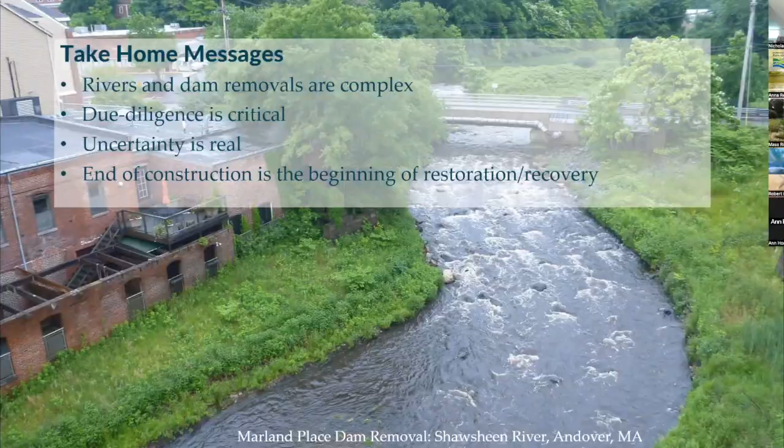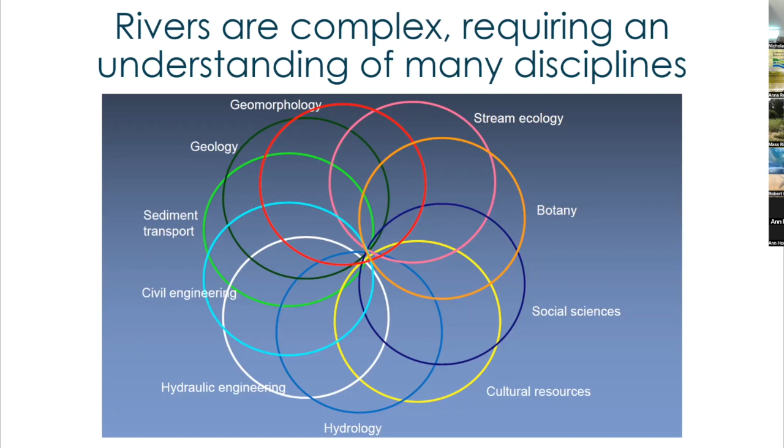And so having a team together that understands the different elements of what's required for your particular dam removal is really important. If one person is coming to you and saying that they know everything there is to know to take out your dam, I'd be pretty skeptical of that. I have not found a person that has all of that information in their head.

And there's a lot that goes into the initial data analysis and data collection. So I'll start with this idea of forensic geomorphology. As a geomorphologist, I might be biased, but I think that geomorphology is the framework in which everything else comes. But I know ecologists think otherwise and engineers think otherwise, and I respect that as well. But forensic geomorphology we find to be really important to understand where the river has been in the past, what the history of that river is, and what the human history and impacts have been, and what the trajectory is going to be.

That requires a lot of investigations, field investigations, office investigations, study of historical maps, historical air photos, historical documents that might have text that talks about these rivers and dams back in the 1600s. There is some great documentation in the 1600s of conversations that were happening in Taunton about whether or not to build dams on the Mill River. They'd seen dams go up elsewhere and seen the catastrophic impact to the herring. And so that conversation is documented in the 1600s there, which is pretty neat to see.

But those maps can be really helpful in understanding what these rivers used to look like. But it's critical also to remember that that's not necessarily what this river is going to be in the future. But it's still really helpful to understand what it was and what the trajectory is.

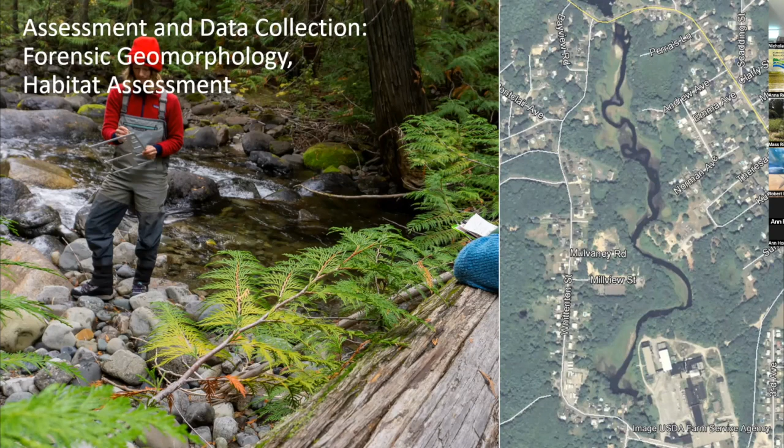Maybe there's a wetland delineation that needs to happen. That's part of this. Maybe there's a botanical survey or a rare species survey or general floodplain habitat assessment as well. Those two assessments typically go pretty well together, the geomorphology and habitat assessment.

We can survey the vegetation, changes in vegetation, the ordinary high water marks, different types of features that are critical for the regulatory entities and regulated resource areas. If there's a wetland delineation, that can be surveyed in at the same time. You might survey in different features that you see, like the stumps or boulders or riffles that you might see within the stream system. And you need to think about the extent of your survey.

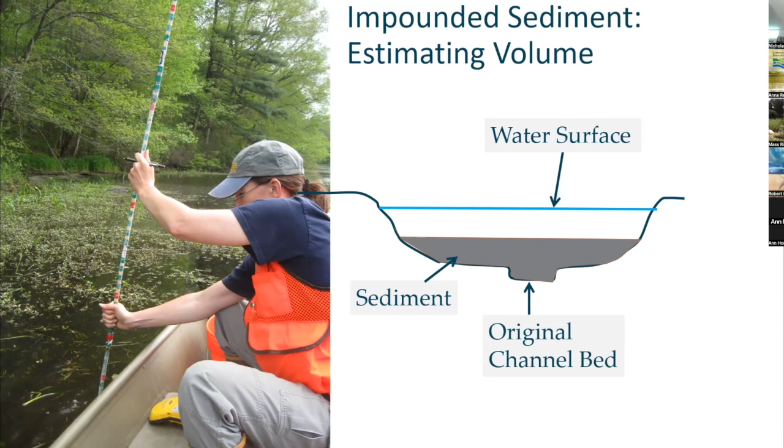But if you have impounded sediment that might be coarser sand and gravel, you can't do this. But you still might want to understand what that volume is. So there might be other tools, or they might have a bigger, deeper impoundment. So there's boat and barge-based vibrocores. There's GPR, ground penetrating radar, that can have some functionality, and other boat-based remote sensing that can get some of this information as well.

Coring helps us to collect some samples to then send to a lab and understand the contamination that might be in there. There are many state licensed labs around that do these types of testing and analyzing, and they send you the bottles, and you put the sediment in the bottles and follow their directions, and then they run the test back at the lab.

So a couple of things that we like to make sure of for the sediment sampling is getting a full composite sample from the top of the sediment down to the refusal layer. So you're capturing that whole layer of sediment, the full thickness, and making sure we are working with the state agencies, the Department of Environmental Protection, sending them a sampling plan, getting some feedback, hopefully, to help guide that sampling plan and moving forwards. Typically, there are multiple rounds of sediment sampling required.

This initial phase kind of gets you an idea of what contaminants might be there. And then if there are higher concentrations of some contaminants, you can zero in on those areas and get more detailed sampling, or depending on the designs, shift the next round of sampling as well to make sure you're understanding the quality of the material that either may be released downstream or might be removed for reuse somewhere else or disposed of in a landfill.

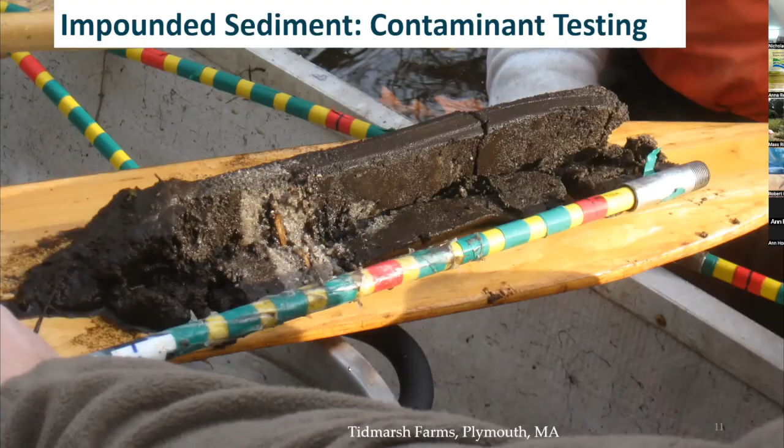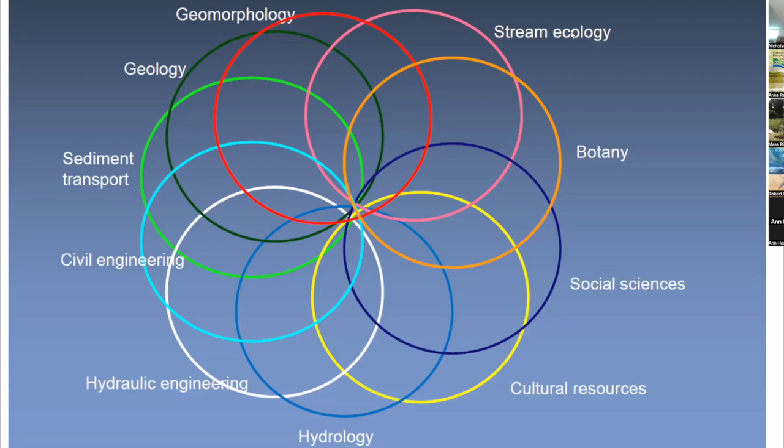So we come back to this in terms of thinking about the complexities of the field-based work and data collection, and in a similar way, we need all of these tools for the analyses as well. So that's what we're going to get into now.

There are so many different types of analyses, engineering analyses, ecological analyses, geomorphic analyses to think about with dam removal and river restoration projects. Some of the big ones that we often think about right off the bat are understanding the hydrology. How much water is in the system? When does it flood? How often does it flood? What are the magnitudes of those floods?

And then the hydraulic modeling. Typically in the past, HEC-RAS one-dimensional models were sort of the standard, and they still are the standard, but there's a lot more 2D and 3D modeling happening on rivers nowadays. It's become a lot more user-friendly and interesting to do and easier to do. But the basic gist of it is that through the hydraulic modeling, we can understand where the water goes at various flow levels under existing conditions and under proposed conditions. So those are really critical analyses to be run right off the bat.

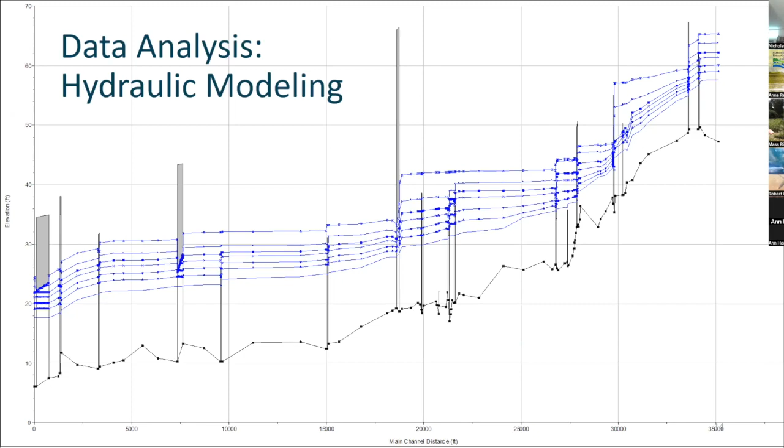But there are so many other design studies and calculations. You need to figure out what size channel you're going to build. If you can't just take out the dam and let the river go, you need to design the river channel. What's the size? What's the width? What's the depth? What are your bank slopes? What's the bed structure? Do you have a riffle pool system, or do you have a riffle run, or do you have more of a low gradient wetland stream system? What's the bed substrate like?

Do you need to import some rounded stone to create riffles so that you don't create a head cut and migrate some erosion upstream? Do you need substrate that is sized appropriately to limit bank erosion and to limit bluff erosion? What's the bank design? Can you use large wood? And with that, how do you size that large wood? How big is it supposed to be? How do you prevent it from floating away? Or do you want it to float away? Those are all decisions that you need to make.

Fabric encapsulated soil lifts, the biodegradable fabric with the soil in there and seed and plantings. When is that appropriate to use? When is it not appropriate? Maybe you need to use riprap or more angular stone. What is the appropriate bank design for this particular site? We don't need channel dimensions twice, I already mentioned that. Floodplain width. How big is your floodplain? That's a design consideration.

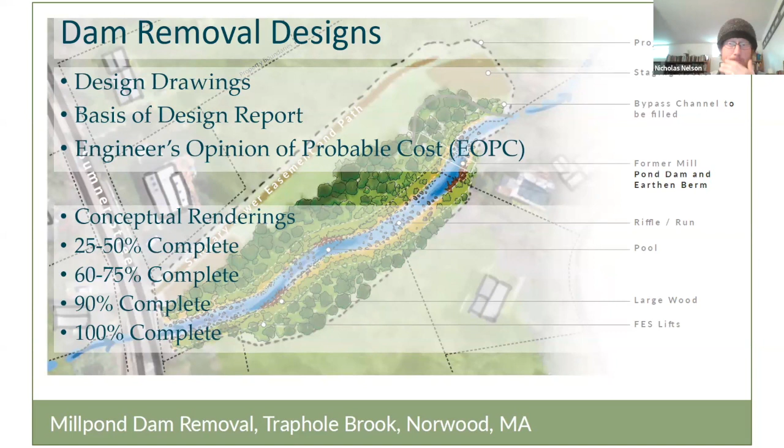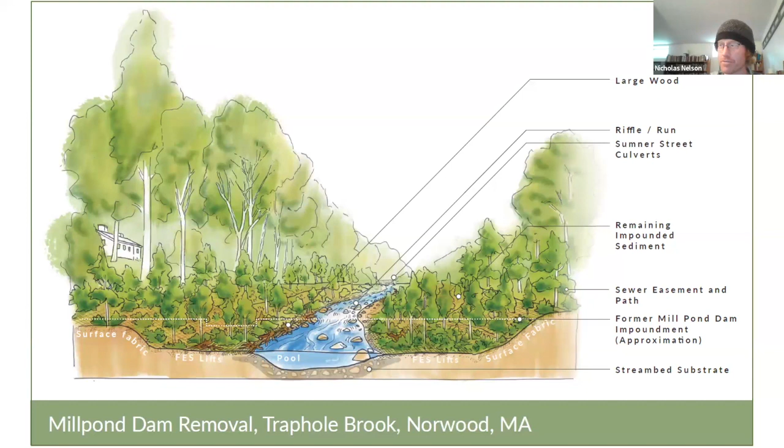So for this particular one in Norwood, this is on Traphole Brook, Mill Pond Dam Removal. Did some conceptual renderings and plan view. Gives you a broad brush idea of what it might look like. You could do these sidelong views, cross sections, or oblique views as well. Again, gives homeowners, gives the public a pretty good idea of what it might look like and kind of a visual of that. Also, examples of other projects really help for this also. If you can show examples of former projects that have already been completed, that's super helpful.

And then 40% design might have a plan sheet. You might have a number of design sheets that go together. I just pulled one out here to compare across a few different levels of design. So you can see there's some designing here, there's some engineering, there's some proposed contour lines, there's cross sections that are cut through here, there's a longitudinal profile on the bottom of the sheet. You can see some areas where we've suggested constructed pools in the blue, other areas of fabric and bank treatments in the green and the yellow.

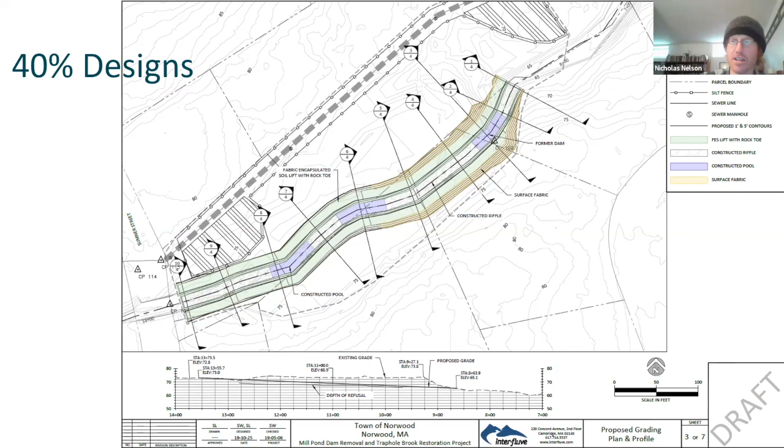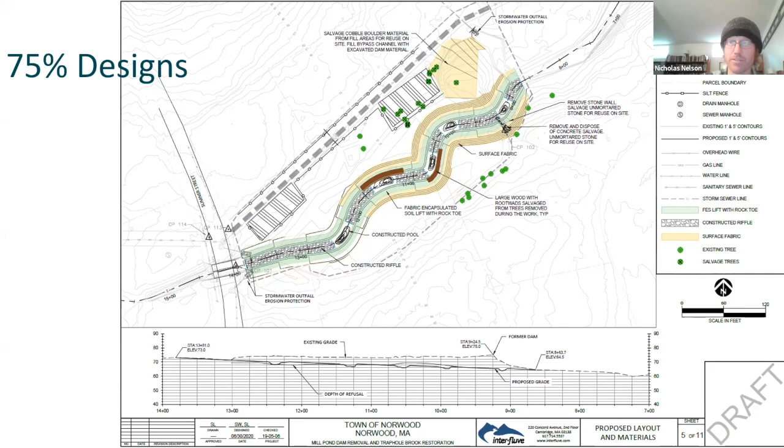And then when we get towards 75% designs, you can see there's a little bit more of a wiggle in the stream pattern, okay? We've refined that a little bit more. We can see the pools are a little bit more defined. We can see some stone in the riffles in between. We can see areas where there's some large wood proposed. We can see trees to be preserved and trees to be removed and salvaged.

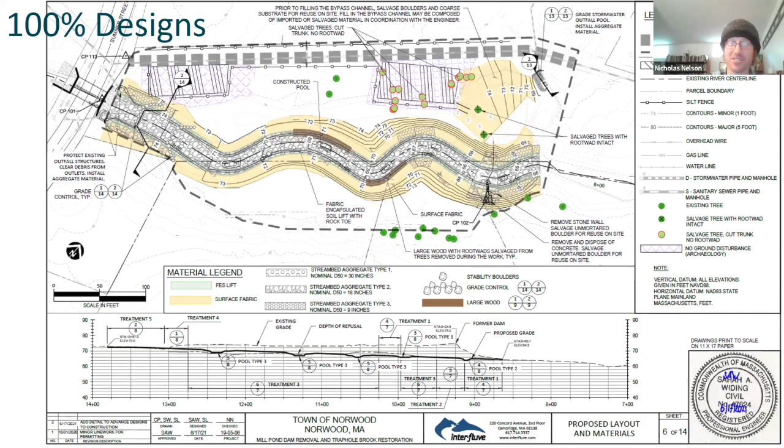And then in final designs, the alignment is pretty similar, but we see a little bit more detail in terms of the longitudinal profile and the materials that are in that material legend element right in the middle of your screen here. So a bit more detail there. So at each level of design, you add a bit more refining. What you're trying to do by the end here is get a plan set that the contractor can read and understand to implement that work. And so it has to be clear, has to be concise, has to be understandable and translatable by a contractor.

Construction cost estimate is a really critical piece as well through all of those different phases so that the project partners, you all can think about raising funds for the project. It's pretty rare for a project to have all the budget for construction right from the beginning. Typically, you are raising money throughout the process. And so I'll point out a couple of things here that I think are important when reviewing these.

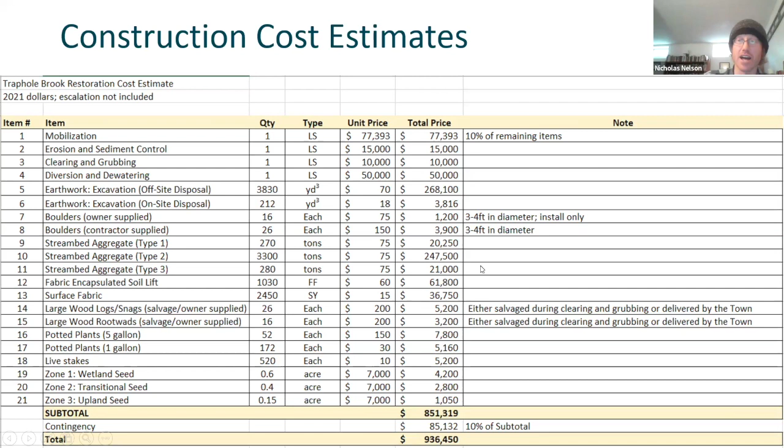At the concept level, that could be 50 to 100% contingency if you're at the concept level of design. If you're at that sort of 25%, it could be 30 to 50% contingency. So you really want to be careful to not attach a level of precision to this estimate that is not based on the level of design.

Okay, so moving through all the assessments, analyses, and designs and into construction. This is the fun part. You've got years of planning put together and designs, and you're finally into construction. How does this actually happen?

It seems exciting to use explosives to remove dams, and it has been done. You can see the Condit Dam removal in the White Salmon River in Washington. Watch this video, it's amazing. They used explosives to create a hole in the bottom of the dam, and it just released a torrent of water and sediment, and you can watch this time lapse, which is incredible.

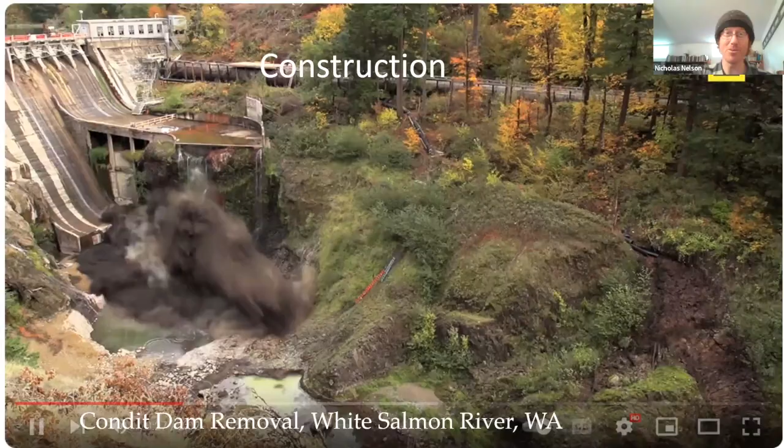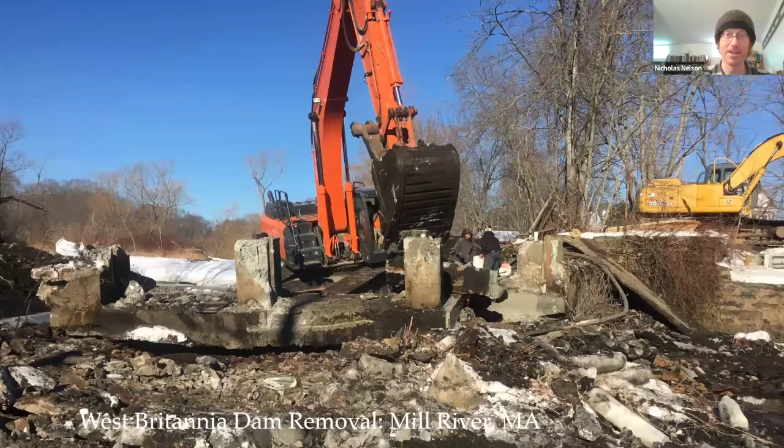This is typically what we see in Massachusetts, smaller dam removals where you have developed some water control to move the water around, and you're removing a small concrete structure. There's a lot that goes into figuring out how to actually do this. Some of that is engineering and the project partner team, but a lot of it's on the contractor to figure out the logistics. I'm going to go through a couple of slides here of common challenges.

One in particular is access, and I think I saw Kris Houle in the attendee list here. This was his picture for the Balmoral Dam on the Shawsheen River. This was a case where the walls on either side of the dam here in the river were considered historic and could not be touched. So we couldn't cut through those walls. And so the excavator had to be lifted into the river, into a place that was walled off by a porta dam. And they had to do all the work from inside the river.

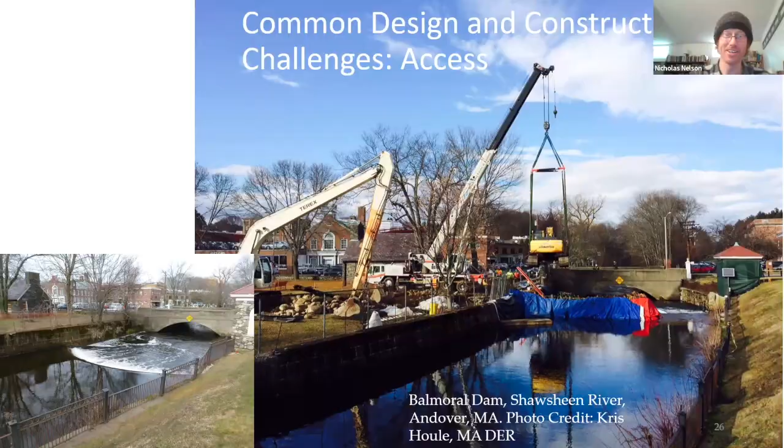So that was challenging. Dealing with that water control, which you can see on the right here in that same site, was really challenging. A lot of pumps to keep that area dewatered. So pretty tricky. Water control is a really tricky component of dam removal projects. Image on the left is a bypass channel around the excavation area. Really tricky here as well.

They lined it with some plastic. Storm events blew that out once. So it's really tricky to get that just right so that it stays in place. So really kind of challenging to figure out the water control for some projects. Sometimes you can work right at the dam and just move the water from one side to the other. In other cases, you need more control like this.

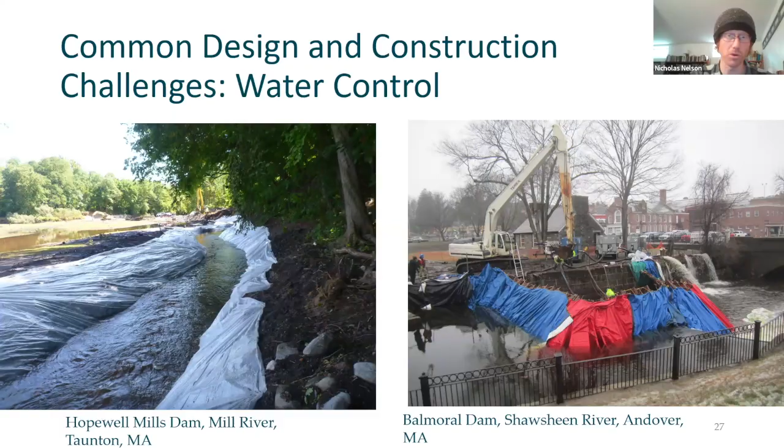Some of the bigger challenges are people. We have had trucks try to drive out on the impoundment overnight or on weekends. ATVs driving out on former impoundments and just getting stuck. Don't recommend it. We have active construction sites where there's lots of project partners that want to see the work. Getting them to the site in a safe manner can be challenging sometimes.

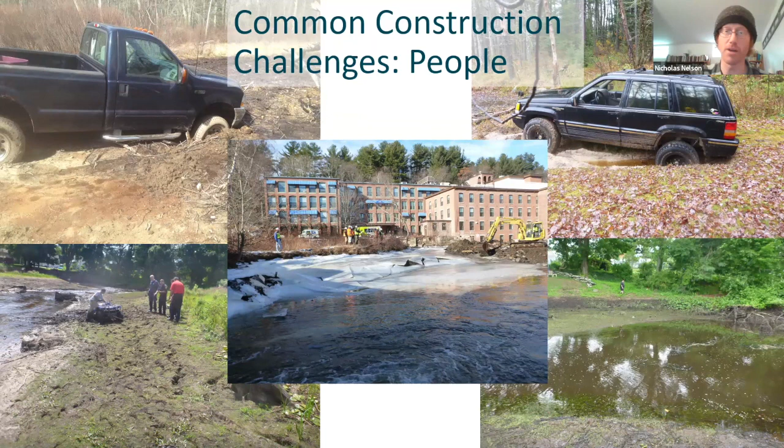You might have private landowners that present a risk. We've had private landowners that are threatening the contractors and threatening project partners. So people can be a challenging element of these projects. And sediment management is a big one. A lot of analysis and discussion goes into this, and coordination with regulatory agencies.

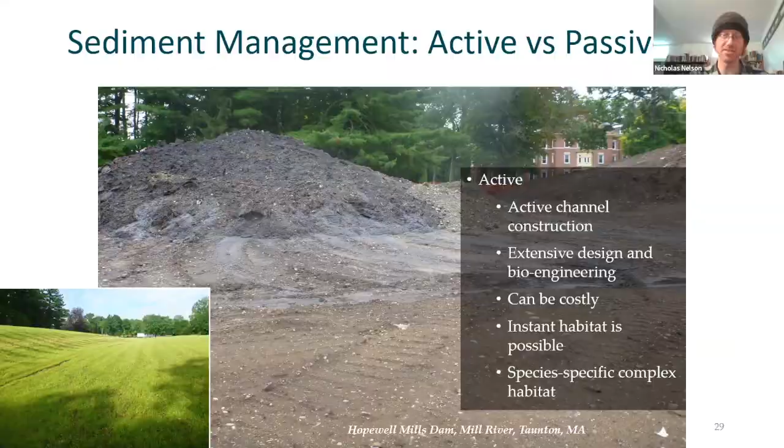Typically in Massachusetts, we have a lot of active management where we're removing sediment, but this is costly. It also allows you to develop a stream channel right away and develop habitat right away, which is great, but it is costly and also removes what might be important sediment from downstream reaches for habitat, for floodplain reconnection, for salt marsh development, that sort of thing.

So passive sediment release is another option and has been done throughout the region, throughout the country. But it requires a lot of analysis and figuring out if that is possible with the sediment that you have. Got to figure out if you're going to impact infrastructure upstream or downstream. So that's critical to think about.

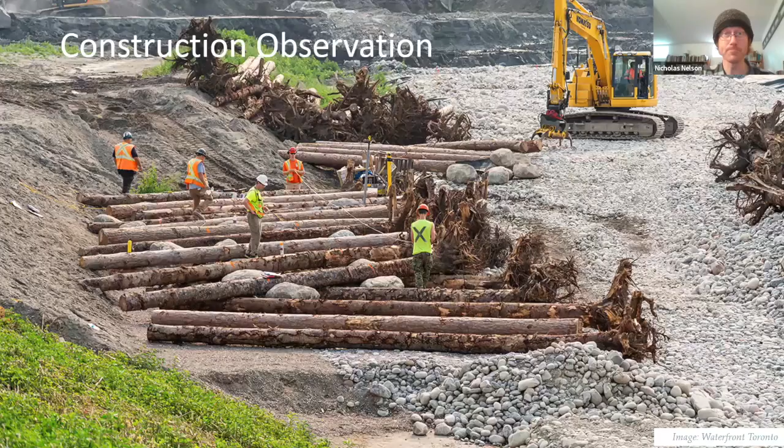Construction observation is critical to help the contractors interpret the design drawings, try to respond to questions that might come up, be a liaison for the owner. But that relationship is different for every project depending on what the owner and project partners need. So recognize that the engineering firm can take on a number of different roles with the construction period.

And I will end and open this up for questions, but just to say that when we're working with dams and rivers, they will be highly engineered restoration projects, but they don't have to look engineered once the project is completed. And with that, I'll stop my share and open up for questions.